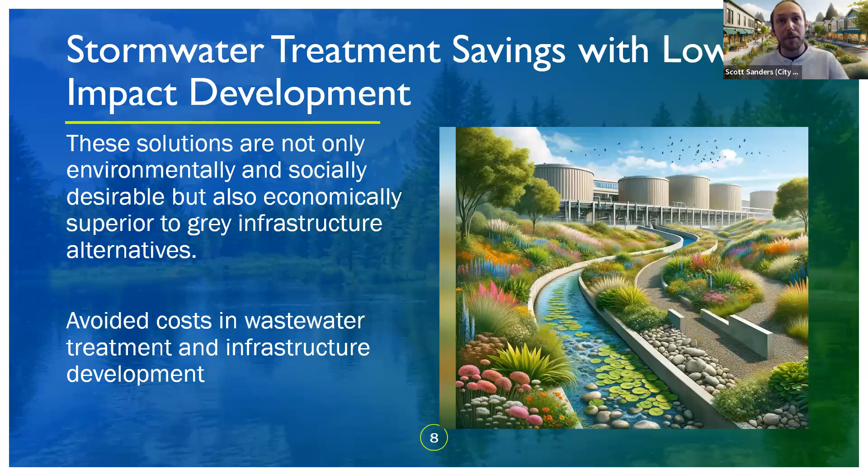Not just the cost savings, there's also energy savings. And what do I mean by energy savings? Well, low impact development is reshaping urban planning with its emphasis on energy efficiency and sustainable practices. At its core, it minimizes the reliance on energy-intensive stormwater pumping and conveyance systems, setting a new standard compared to your traditional gray infrastructure. This reduction in energy use for stormwater management is also just the beginning.

One of its most significant benefits is its role in mitigating the urban heat island effect. By integrating features like green roofs and permeable pavements, LID reduces the absorption and retention of heat in urban areas. These elements not only cool the immediate environment, but also decrease the surrounding air temperature, leading to substantial reductions in the energy needed for cooling buildings. Moreover, LID's use of trees and vegetation creates natural shade, further lowering the temperature and reducing the demand for both cooling in summer and heating in winter.

This natural shading, coupled with the cooling effects of green spaces, significantly cuts down energy consumption related to heating, ventilation, and air conditioning systems. Furthermore, LID enhances local microclimates. By incorporating natural elements and reducing impervious surfaces, LID promotes better air circulation and temperature regulation. This improvement in microclimates contributes to a more comfortable urban environment and to reducing our reliance on artificial climate control systems and hence the associated energy costs.

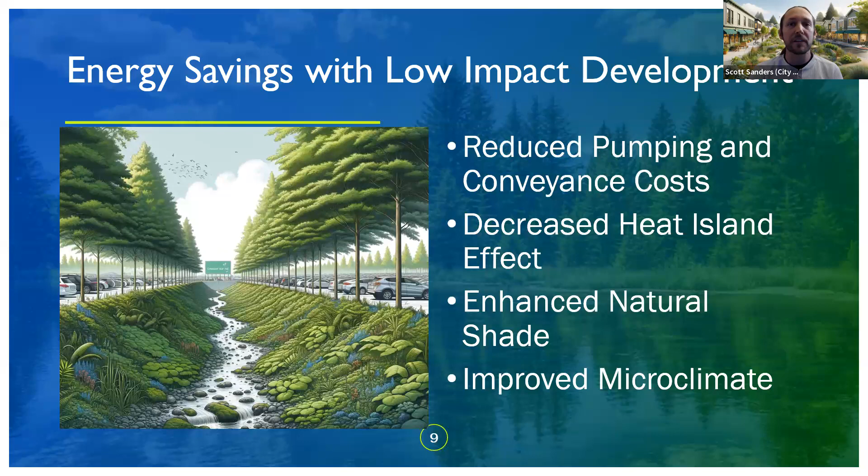And now, cost compared to gray infrastructure. Well, let's get into why LID isn't just an environmentally conscious choice, but it's also a financially good one, especially when compared to your traditional gray infrastructure.

And when we talk about construction costs, LID practices like bioretention basins, vegetated swales, permeable pavements, they typically require less upfront investment. This is not only because they often use less expensive and locally sourced materials, but also because they can be easily integrated into existing landscapes, reducing the need for costly overhauls. I've seen examples where the initial cost of LID implementations were significantly lower than those of conventional methods.

But even moving on to long-term maintenance, the natural self-sustaining design of LID means it generally requires less upkeep than gray infrastructure. Think about it. A rain garden or a green roof, once established, needs minimal maintenance compared to the ongoing repairs and replacements needed for concrete pipes and stormwater basins. This translates to substantial savings over time.

And not just savings there, but let's talk about property values, right? LID doesn't just save money, it makes spaces more attractive. Green spaces, improved water quality. These features make urban areas more desirable, driving up property values. This not only benefits property owners, but can also lead to tax revenues for cities.

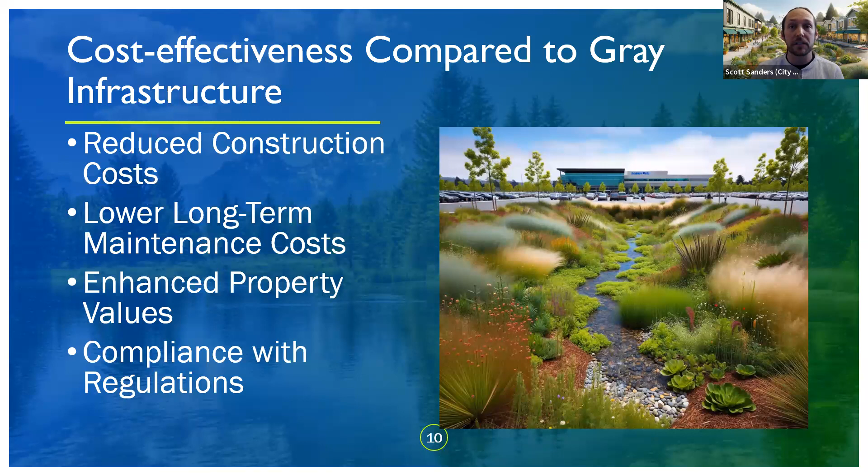Into some environmental benefits of low impact development, well, it exemplifies the principle that form follows function in its approach to environmental stewardship; they're designed to harmonize with nature. LID transforms urban planning by enhancing stormwater management in a way that is both aesthetically pleasing and functionally effective. The key lies in allowing water to naturally infiltrate the soil, thereby reducing runoff and pollution. A clear instance where the design, the form, directly complements its purpose, the function.

So take, for instance, features like rain gardens and permeable pavements. These aren't just efficient solutions for stormwater management, they're also aesthetic elements that enhance urban landscapes. They embody the concept of form follows function by serving dual roles, managing water effectively, while also adding visual appeal and fostering biodiversity. These features create habitats for wildlife and support a diverse range of flora and fauna, integrating nature into our urban fabric.

Moreover, LID addresses, like I said earlier, the urban heat island effect. They integrate natural elements into cityscapes. LID helps make our cities cooler and more livable. And this is a perfect example of how functional design can lead to greater comfort and environmental benefits.

In essence, LID is more than a mere development strategy. It's a commitment to a sustainable future, where the form of our urban spaces is intrinsically linked to their ecological function. It's about creating environments that not only serve their intended purpose, but do so in a way that respects and enhances our natural world.

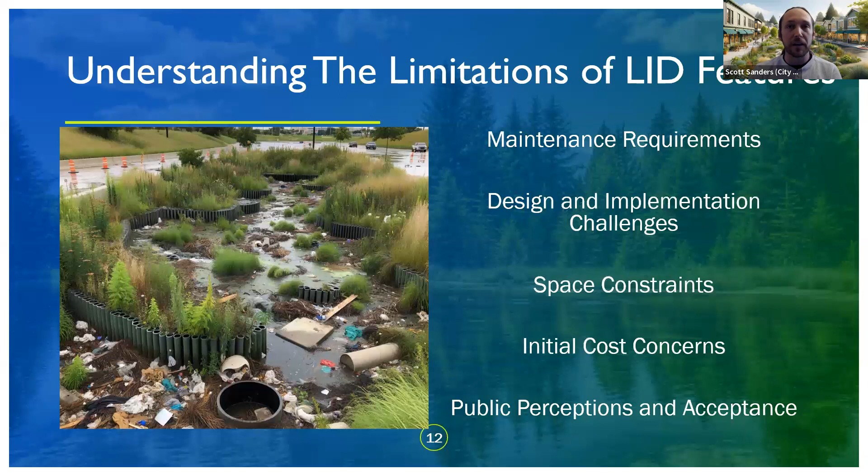So a big one that's always out there is the focus on maintenance. A poorly maintained LID feature is not going to work well, and it is crucial to recognize that it's not just routine upkeep. LID maintenance demands regular specialized attention, distinct from traditional practices, and carries its own set of cost implications. This level of care is vital. Neglecting it can lead to problems like clogged filtration systems, which severely undercut the ecological efficiency of these systems.

Today, we're not just examining the maintenance challenges and their impact on LID functionality, we're also exploring effective solutions to uphold the integrity and performance of LID installations. We're going to have a whole panel discussion later. It's going to go over the operation and maintenance and how important and vital it is for these systems to be maintained in the long term.

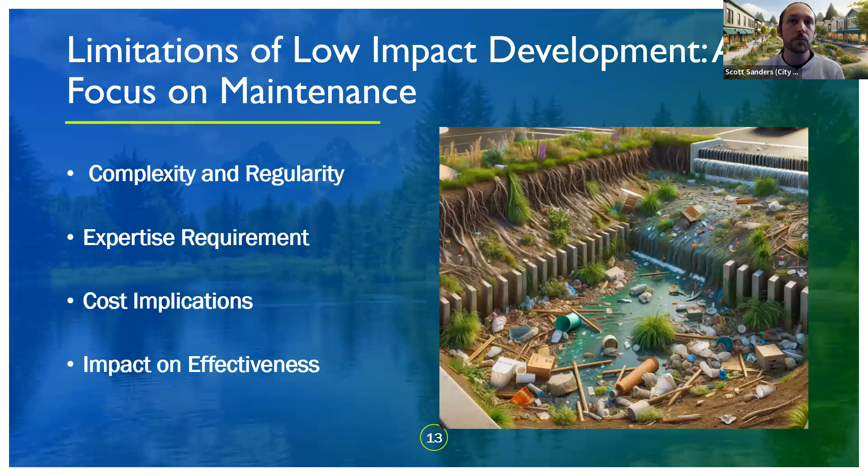And there's always limitations of LIDs and the design and implementation challenges. Designing and implementing low impact development has its own challenges. From integrating with current infrastructure to navigating the maze of regulation and policies, each step requires careful consideration. So site-specific conditions, knowledge gaps, financial constraints, and the need for long-term planning and coordination further complicate these LID projects. We're going to discuss how these factors can inhibit LID practices and what measures can be taken to overcome these hurdles for a more sustainable future.

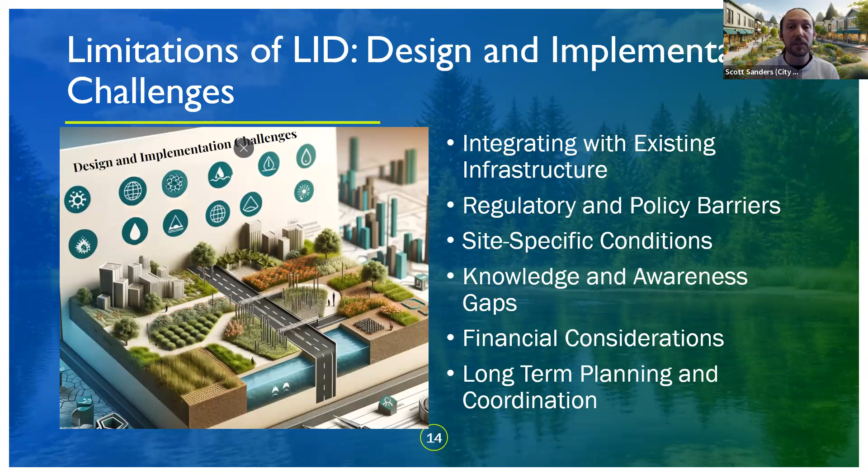Our first limitation here is navigating space constraints. Space constraints in dense urban environments pose significant challenges to low impact development. Property boundaries, ownership issues, zoning regulations can all limit the implementation of LID features. Retrofitting LID into existing landscapes often requires innovative, multifunctional designs to maximize the limited space we have. Today, we address how to navigate these constraints, ensuring that LID can be part of our urban ecosystem, even where space is at a premium.

And as cost-effective as LID can be, it can also have initial cost concerns. The initial costs associated with low impact development can be a barrier to its adoption. Customized designs, infrastructure modifications, and specialized materials and plant selections contribute to these upfront investments. Additionally, the need for trained labor and potential economic incentives or returns on investments must be considered. We'll explore these financial concerns, emphasizing the long-term value LID brings through its sustainable practices and the potential for cost recovery over time.

And that was kind of my beginning section. That was an overview of benefits of LID and some of its limitations. I'm going to stop sharing my screen right now, and Ashley's going to be introduced here. Ashley Cotter, she's with the City of Rohnert Park as well. And she's going to present what was on previous trainings.

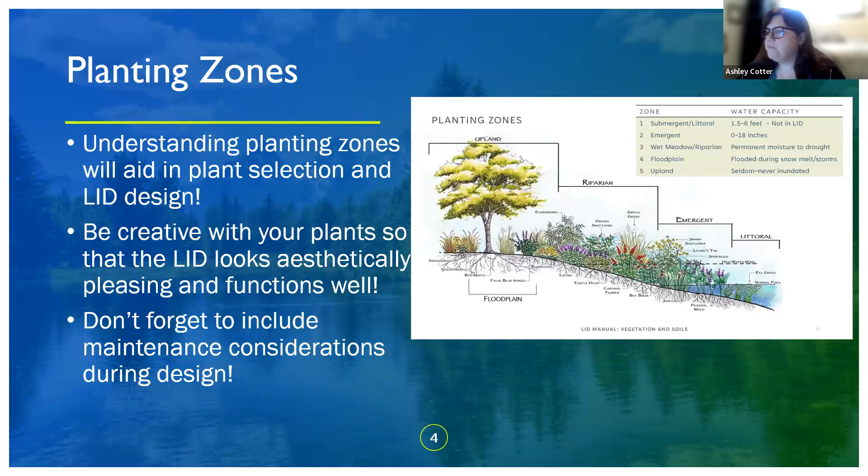Elizabeth and Alyssa provided some great examples on maintenance and situations in which maintenance was neglected and considerations to make during design. And that also impacts your plant selection as well. So maintenance would include weeding, cleaning out leaf debris and trash, and making sure your splash diverters are where they're supposed to be. So that is critical as well. Again, just to make sure that your LID functions the way it's supposed to.

And then another thing they touched on was the importance of the consistent use of terminology. They pointed out that grassy swales and bioswales are kind of used interchangeably, but they actually do have different features that really differentiate them. So utilizing the correct terminology indicates what feature you're actually planning on utilizing during design and also has maintenance implications and whatnot. So making sure to utilize the correct terminology when submitting your design is important.

And then they also gave this really great graph on soil breakdown, and infiltration really depends on the kind of soil. So around here we do have a lot of clay soil, so the native soils in Sonoma County usually do need to be replaced, but they also aren't checked prior to construction, so that was interesting.

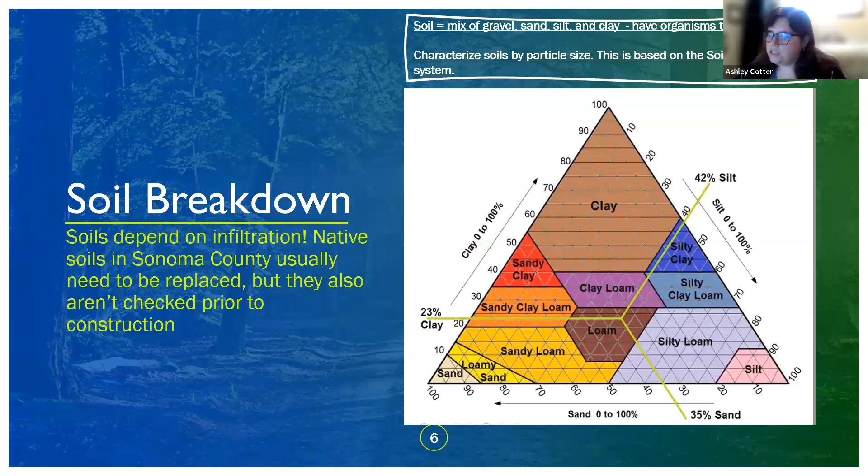And they also provided some more information on soils, about how everything comes together, and explained how the soil is classified utilizing a USDA classification, as well as hydrologic soil groups. Your engineer will look up a soil that will likely exist in the LID. However, the USDA maps are actually utilized for agriculture and crops, so they're not really utilized for LID infiltration. So the map will provide an approximation, but not anything site specific.

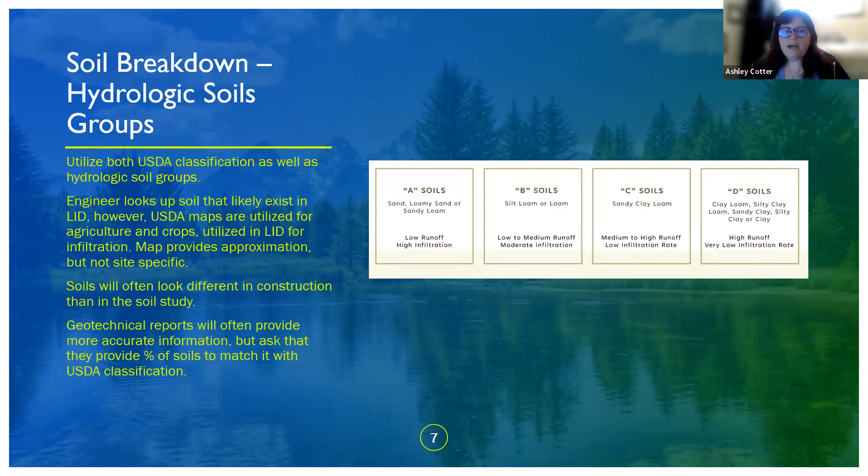And they also did explain that there is a likelihood that when you get into construction, the soil will look different in construction than in the soil study. So Elizabeth recommended that if you do have geotechnical reports, to ask for that. And you can also ask that they provide a percentage of soil so that you can match it to USDA classification. So that's helpful.

And then the types of soils in LID bioswales. First you've got your structural soils, and the structural soil is usually installed above the native soil when native soil can't be used, and structural is actually an engineered soil. And there is construction sediment that shouldn't contaminate it, so it's really important to keep that protected. Structural soil is well graded, medium and fine sand, mixed with a certain amount of organics so that plants can grow in it. And your bioswale soil mix is much finer than structural soil.

And then you've got your topsoil, which sometimes you don't actually need. That was interesting. And also it stressed the importance of mulch, which should be used in the beginning to help with weed control. So emphasis on mulch, not bark. Mulch protects the soil from erosion, traps particulate pollution, and reduces water flow and velocity with plants and rocks. Arbor mulch is the best, and again, don't use bark.

Also, they emphasized the timing of bioswale construction, which is so important. Ideally, the bioswale should be constructed at the very end because they don't want any construction contamination to get into the bioswales. If it's installed last, you don't necessarily have to test for contamination, but if it's installed early, then it will have to be tested before you're done in order to confirm that there is no contamination. So you can definitely protect your bioswale soils with geofabric unless it's dug in.

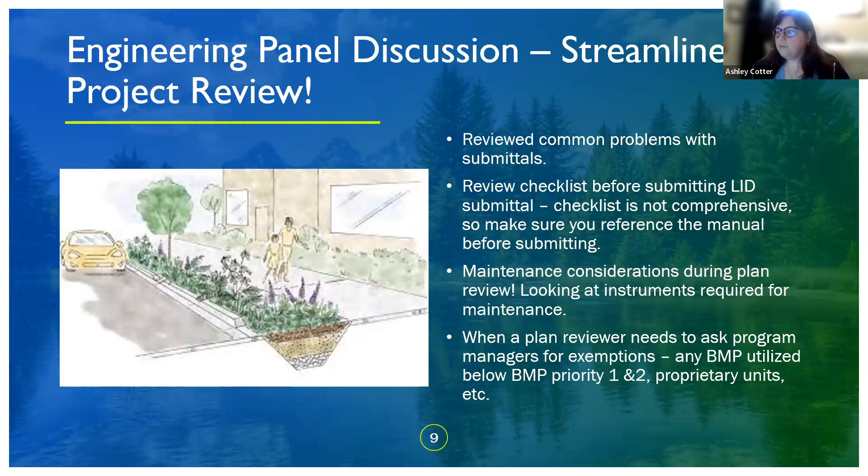Just make sure that you ask your program manager for any exemptions before submittal, such as any BMP over 1 and 2 or below 1 and 2. So you will need an exemption to do priority groups 3, 4, 5, and 6. Again, just tips and tricks for a correct submittal: consistency is absolutely key. Make sure that your submittal has all of its components and everything is spelled out in the narrative. They will indicate that things are in the narrative, and you go back and review, and it's actually not in the narrative. So that can really slow down your timing to get your LID design approved.

Use the LID calculator as much as you can. The city of Santa Rosa is pretty specific. They will not approve anything that is not using the LID calculator. The calculator is actually required per the LID manual, so alternative calculations will require additional review with an additional narrative. So the calculator really does provide a key level of consistency. And they also had some really good information about how submittals are reviewed from initial to final. So if that section interests you, I would encourage you to watch the training.

And then Heaven Moore also presented on compliance and some more FAQs for the 2022 training. And so again, that is just a really informational training because we will be touching on some subjects today, but not all. So if any of those sections really interest you or feel that they would be applicable to you,

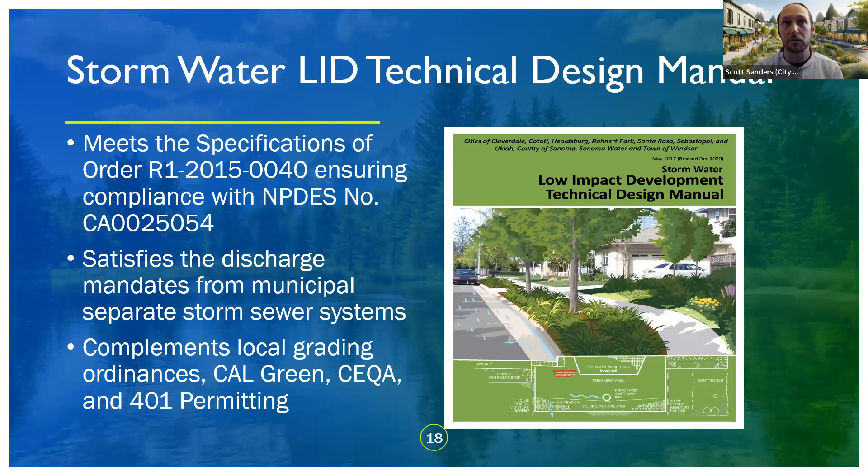So what does the manual start with? It has its own goals for sustainable development. So we shift to the core ambitions of this stormwater low impact development design manual. It anchors our efforts in sustainable development. This manual sets forth the strategic framework designed to uphold the quality and integrity of our water bodies. It aims to mitigate the adverse effects of stormwater runoff by preserving the biological integrity of aquatic ecosystems. The key aspect is the management of impervious surfaces, steering new developments towards a natural water balance through infiltration, evapotranspiration, and stormwater capture and reuse.

Furthermore, we commit to the reduction of pollutant loadings, addressing contaminants from hard surfaces. This is achieved through a blend of source control best management practices, BMPs, the most famous word of them all, and innovative LID planning and design strategies coupled with treatment control BMPs. The manual guides the selection and maintenance of these BMPs, ensuring that they're aptly chosen, designed, and sustained over time. It emphasizes hydromodification control to maintain post-development hydrology, ensuring that our interventions are as unobtrusive as possible to the natural environment, while also preventing the creation of habitats conducive to vectors. In essence, the goals articulated in this manual encapsulate our proactive stance towards a sustainable future, one where development and nature exist in a state of balanced coexistence.

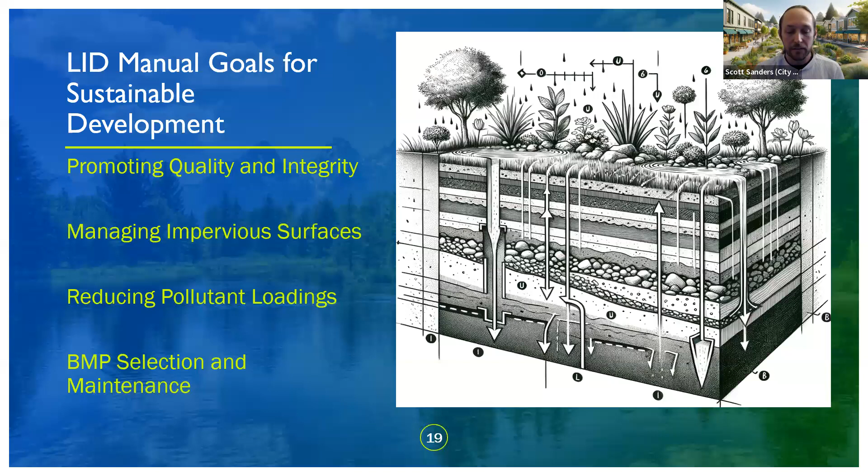And what the manual starts off with is understanding our project triggers. So it's crucial to grasp the project triggers, the specific conditions under which LID requirements are activated. The manual outlines that every parcel within the development, already improved or undergoing alteration, falls within our purview. Improved parcels signify areas previously developed and distinguishes them from untouched land. Yet, our responsibility extends beyond the site's confines, encompassing associated public improvements too.

This broad scope covers essential off-site work, like trenching for utilities and subsequent repaving, integral to the project's infrastructure. These tasks, while potentially situated on existing public roadways, are integral to assessing the project's full impact on stormwater management.

The manual clarifies the treatment of gravel on site. Historically, laid gravel is considered pervious, preserving the land's natural infiltration capacity, unless it's proven otherwise. But conversely, gravel that's introduced as part of a new development is treated as impervious by default, unless there's documented evidence to attest to its permeability.

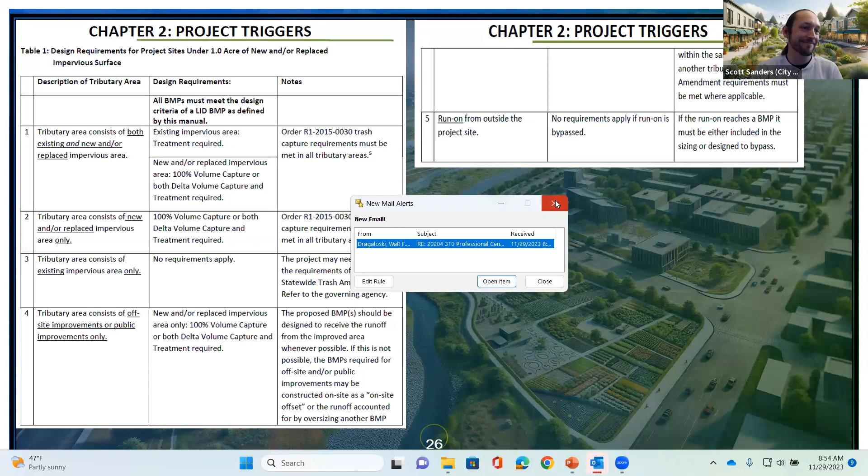Hey, Scott, your email alerts are showing. Oh, thank you, guys. Sorry about that, Scott. Oh, no, you're totally fine. I saw it there. I just forgot that that's the screen that's being shared.

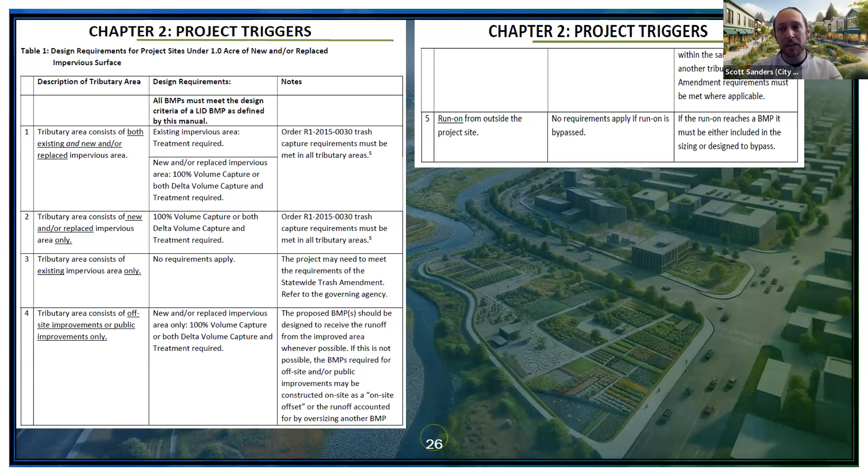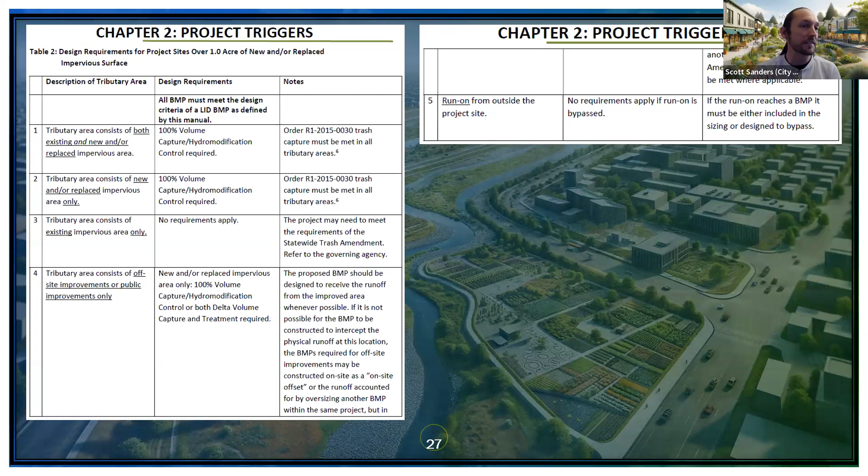So thank you, Flannery. So this table, it's more than guidelines. It helps you find out what your project needs. And the next table, this is for projects over 1 acre. This is moving to larger scale developments, and the criteria for stormwater management become a little more stringent, and it's all in Chapter 2 project triggers. And then the manual switches and goes into submittals. And submittals is a big one. And that's kind of where we're going to head into our next discussion.

We have a little panel discussion. So get ready, Michael and Jesus. I'm going to be bringing you guys to the forefront here soon. And I'm going to ask that you both introduce yourselves and explain your background and what you do. So let's start with Michael. Hi, my name is Michael. I'm the Stormwater Program Manager for the City of Healdsburg. I joined last May. Before that, I was an environmental compliance specialist with Mendocino County, working on MS4 stuff there. And part of my role here is reviewing submittals, both the initial and final, and then making sure they check out. So I will try to answer these panel questions to the best of my ability. Might have to rely on my peers for some of the questions.

Thank you, Michael. Jesus? Hi, pardon me. My name's Jesus McKaig. I work for the City of Santa Rosa, and I am a staff engineer. So I review primarily entitlement projects and building permits. So I really only look at the initial SULIDs, not the final, and I also don't have much dealing with inspection. I do interface with both Flannery Banks and Nick Sudano here in the city as well, so I do have some perspective from outside of that exact review. But primarily I look at the initial SULIDs. I've been working for the city almost 17 years. I will also endeavor to answer any questions. And if I look like I'm floundering for even 1 second, somebody with more knowledge jump in immediately. But otherwise, I will do my best.

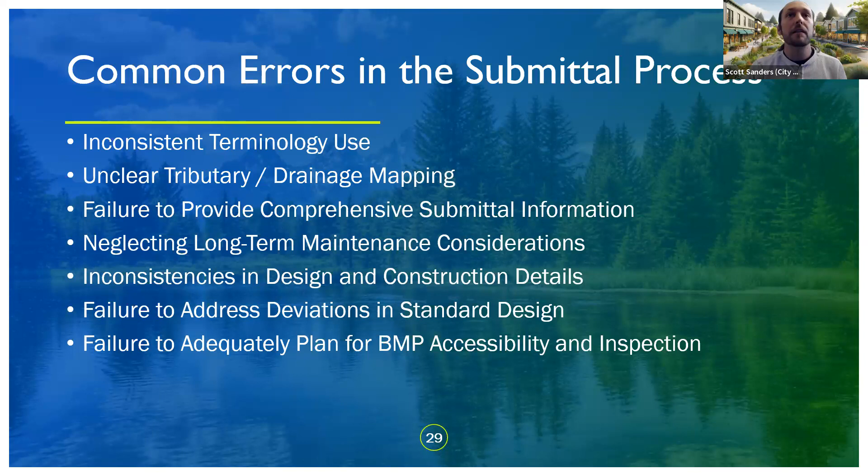And this isn't just about pinpointing issues, it's about enhancing our approach to low impact development. Each challenge presents an opportunity for learning and improvement. Again, when we go through this, feel free to throw some stuff in the chat if we can speak to anything more clearly.

Our first one is going to be for inconsistencies in terminology used within this dynamic field. With LID projects, we have the potential to improve how we manage stormwater and design these landscapes, but at times the language we use can become a stumbling block. And today we're going to aim to explore the impact of these interchangeable terms. You got multiple people working on these features that might not be in communication, so we're going to figure out how we can all come together.

So let's see here. We're going to start with, let me see, my first question. Let me get my questions up.

All right. Michael, can I do this first question for you? It's kind of your role as a plan reviewer. Have you encountered situations where terms like bioretention, rain garden, detention basins, if you're the architect or the engineer, are people using these interchangeably? And could you describe any challenges or misunderstandings that arose from this confusion?

Yeah, there seem to be subtle differences between certain terms which are often used interchangeably. It's common to see words like bioretention and bioswale used interchangeably, along with the terms detention basin and retention basin. When these terms are used in an incorrect manner, as a plan reviewer it's difficult to determine the actual intent of the design. For example, if a plan references a detention basin as a BMP to meet LID requirements, this can be problematic for the plan reviewer to understand if the LID manual requirements are going to be met.

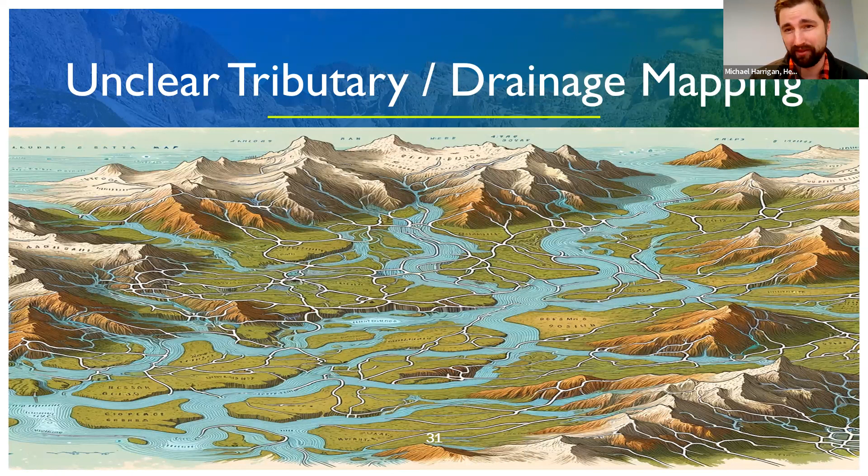We had one project where there was a disconnected roof, and all the runoff from that ended up going straight to a storm drain. It was before my time, but they went back and looked at it, and they were like, oh, there weren't actually clear elevation markings in the plans. So just things like that can arise.

And if I could just add a comment too, this is Heaven with the Water Board. I'm stating the obvious, but just for clarity, it's important that this is truly an exercise of delineating the tributary area, not the tributary area limited to the property line or project footprint, because what we're wanting to make sure is calculated and addressed is that the BMP or the high flow bypass structure is properly sized for the water that it receives.

And so having this information, the design team can make important decisions about whether off-site run-on is commingled or whether it's bypassed. Make sure that flood control and high flow bypass are addressed, and make sure that the individual BMP, which is why you don't have just one tributary area for the entire site, right? But a tributary area for each inlet and each associated BMP is properly sized and designed for that particular amount of drainage that it needs to manage and treat.

So again, oversimplifying, preaching to the choir here, but that's an important distinction that we truly are talking about tributary area. Yeah, I think that's very well put. I've seen a plan where it's just one tributary for the entire property when water wasn't actually draining like that. So I think it's worth emphasizing. Great, thank you.

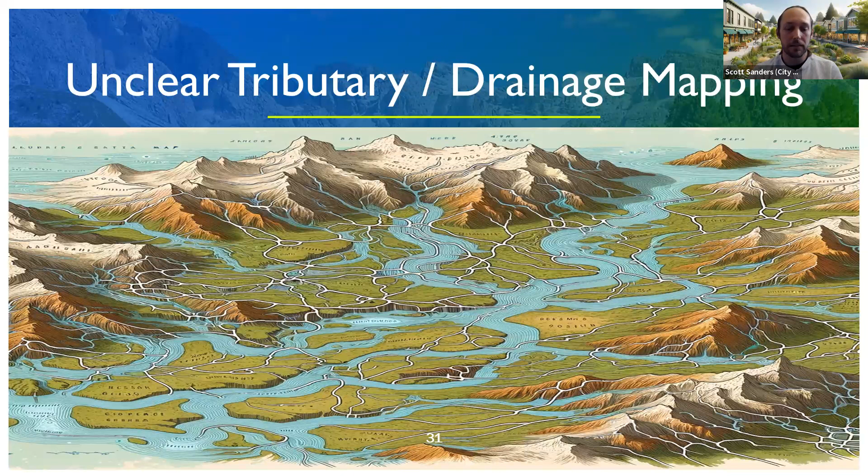All right. And then our next topic, let's see here. Okay, failure to provide comprehensive submittal information. So here we're going to emphasize the significance of detailed narratives and handling sensitive features and triggers for LID development, and the importance of pollution prevention and runoff reduction measures in these submittals. And I want to start off maybe with you, Jesus. Can you share an example where a comprehensive project narrative played a crucial role in achieving LID project objectives?

Well, if you don't mind, I'd probably want to take it from the other direction, just because I'm finding more often than not that the narrative itself, which is where you get the opportunity to talk about your project top to bottom, where it is, what it's about, what its full scope is, that's often missed.

I have found, and maybe this isn't one example, it's probably several kind of conflated, but where the narrative will either not address topics such as, if there's a groundwater issue, like it's very high groundwater, it's not in there, or sometimes the soil type won't be called out in there, or will be called out differently in the narrative than it is in the supporting reference documents, which is like, well, that's kind of a head scratcher. And then you got a third one in the calculator. So which one are you really using?

I have found that when the narrative does cover all the bases, I mean, if you have a creek in your backyard, if you have a bunch of trees on site, any of that, or covering utility work in the streets, like the trenching, when it covers everything, it really paints a better picture for reviewing than the calculations and the exhibits and all that. And if they don't speak to each other, then you kind of don't have a cohesive report. And yeah, I'd say the narrative is one of the most important parts.

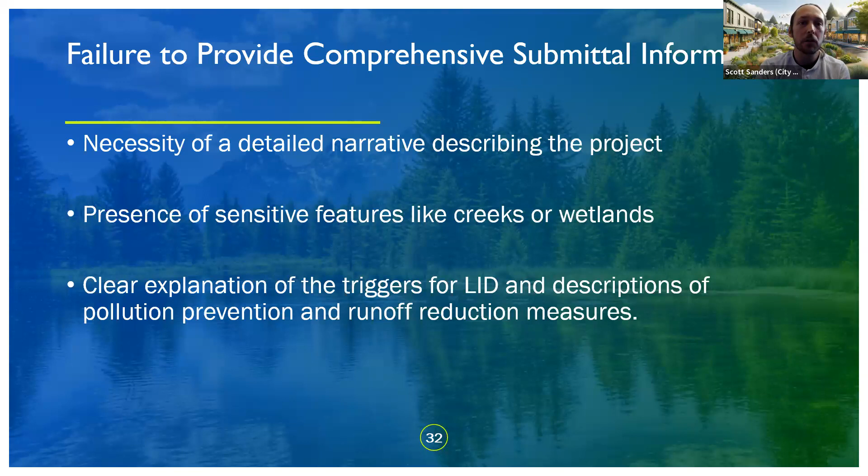All right, and we're gonna keep going. We're gonna skip this slide because we do talk about a lot of long-term maintenance in our next panel discussion, and just for time. But here we're gonna come to discussion revolving around common pitfalls that often surface in LID projects: the failure to identify and correct deviations from standard design. This is always a crucial issue that can impact efficiency, compliance, and the long-term success of these LIDs.

Jesus, I'm going to ask this first question to you if you feel comfortable with it. I have my own answer if not, but in your experience as a reviewer of these submittals, can you share instances where you've encountered deviations from the standard LID design, and what were the implications of these?

So with regard to deviations from standard design here, we're referring to if applicants or their engineers choose BMPs that are either not listed or differ greatly from what is listed in the manual, and it either doesn't function with the site or requires additional review. Is that what you're looking at? That happens all the time, if that's what you mean.

Yeah, I've also encountered deviations in the sizing and the placement of these bioretention facilities. Some projects attempted to reduce costs by undersizing the features, and that just leads to insufficient stormwater management capacity and increased runoff. Gotcha. And common deviations involve vegetation selection, and it seems like they always deviate and they don't think we're going to catch it or something.

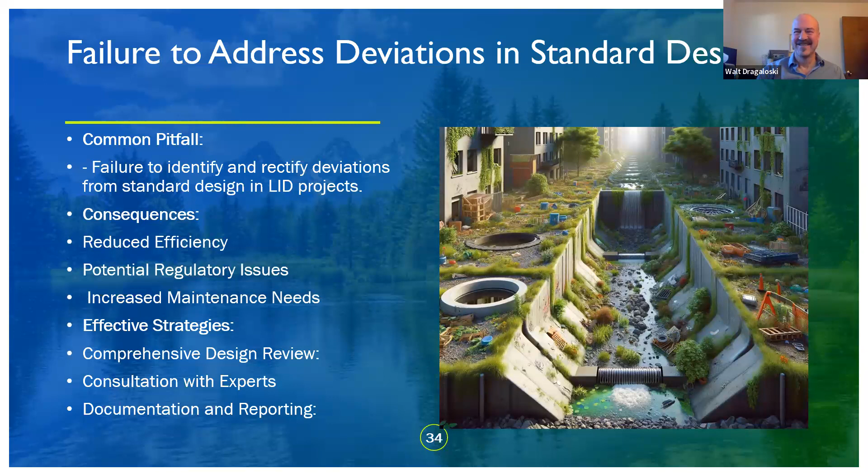Great. And we love your soapbox, Evan, so bring it out whenever you need it. And then that's actually going to finish our first panel discussion. So thank you to our panel members. Michael, Jesus, loved it. Thank you so much. Anytime. They're all week.

All right, and then Flannery. Do you want to jump on in? Yeah, thanks. Just takes a second to get set up. Sorry, it's always tricky to get your presentation going and still see the Zoom info. Okay.

So today I'm going to be covering a few of the case studies that we have. We've done this before and it seemed very beneficial. So I'm going to run through these pretty fast, and we're just going to be focusing on what the specific site challenges were and what the site constraints were and how these projects moved through them, and some additional paths forward that we could see as staff. So it's focusing on those challenging sites where you're restricted by contamination or historical buildings or space of assorted variety.

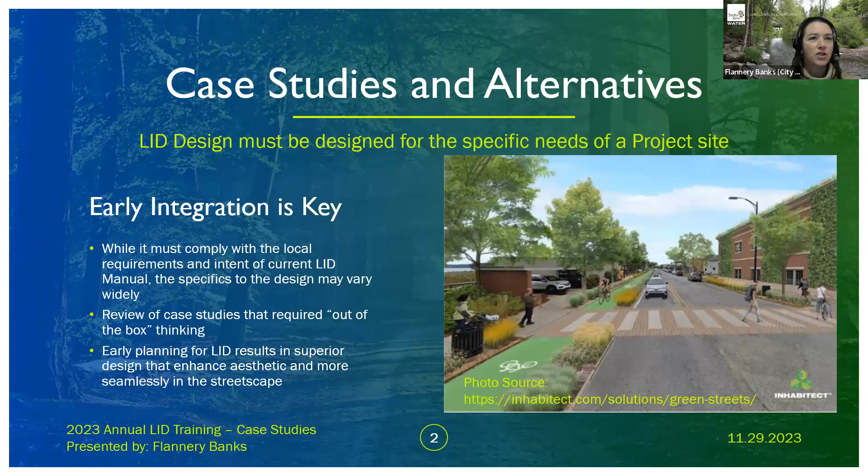So while you do have to comply to our LID manual and its requirements and our regional interpretations of the permit, especially with the more and more infill projects that we're getting, you really need to think outside of the box and keep in mind that, while you're following our standard details for LID, you really need to be sizing it, changing the geometry, making adjustments for whatever is very specific to your site.

The first project we have up is the Cannery project. So this is off West 3rd in Santa Rosa. All the projects I'm speaking to today are from Santa Rosa, and I did not introduce myself well. I'm sorry. I'm Flannery Banks. I'm one of the co-permittees. I'm with Santa Rosa, and I'm the storm drain asset manager for Santa Rosa and serve as the technical expert around stormwater and storm drain for Santa Rosa.

So this is a Santa Rosa project. It's Cannery. It's a former cannery, and what you see in this image, photo credit to Press Democrat, but they had this historical facade that they were required to keep. They had very specific street requirements. It was a very narrow public right of way. It's actually going to be a private street, I believe, at this point. And they had a lot of space constraints with this facade fitting in the city section.

So it was a multi-story, 6-story apartment complex. So there's aerial, there's very strict fire department requirements for access on this one. There's strict street section requirements. They had to do a contiguous curb, gutter, and sidewalk. There's just no room in this area for the landscape strips, especially taking into consideration the historical building.

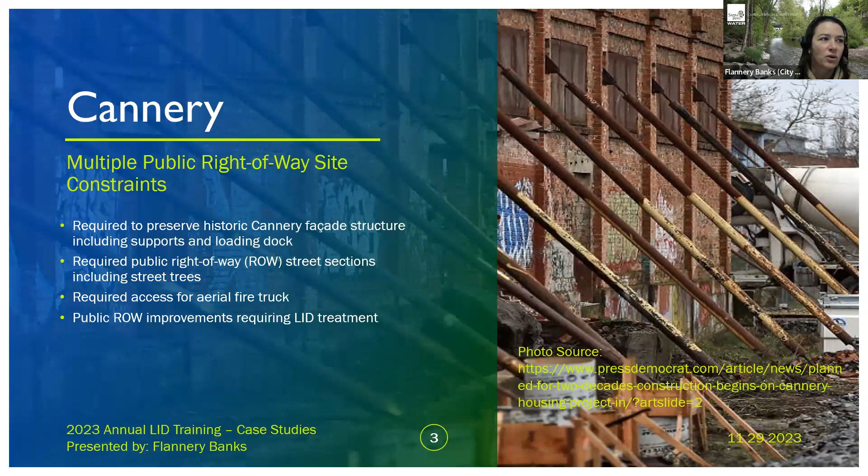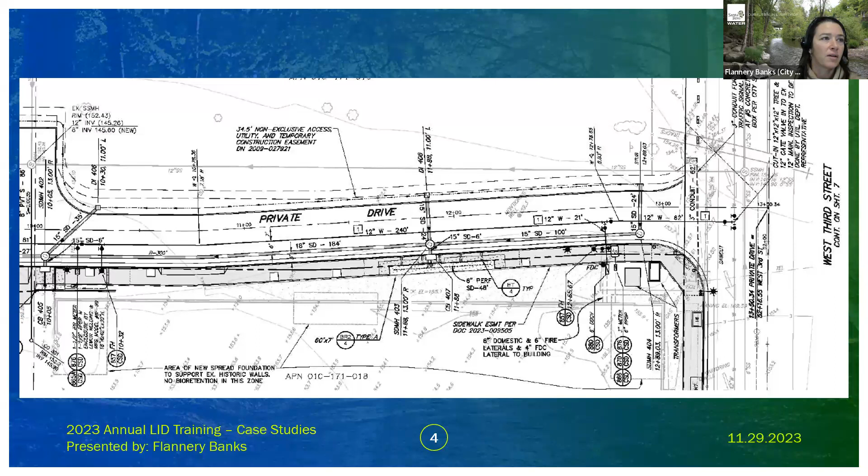And the project came to us in entitlement and said, I don't know how to meet our LID requirements with all these other requirements you have on the project. Like, help me find a path forward for this. So we met as city staff, and I encourage other jurisdictions to consider this, that when it's all of our regulations getting in a project's way, so to speak, I feel that it's really part of our duty of service to have those internal dialogues and try to figure out how this project can move forward.

So we had an internal meeting with entitlement, we had traffic engineering, we had fire department, and myself to hash out all these different requirements on this project. And what the project ended up coming up with was a partial daylighted, partial subsurface bioretention facility. They're using trench drains to get the water from the roadway underneath the sidewalk back into this facility. And part of it's daylighted, and portions of this abut raised planters to help with the LID and the beautification and the vegetation component.

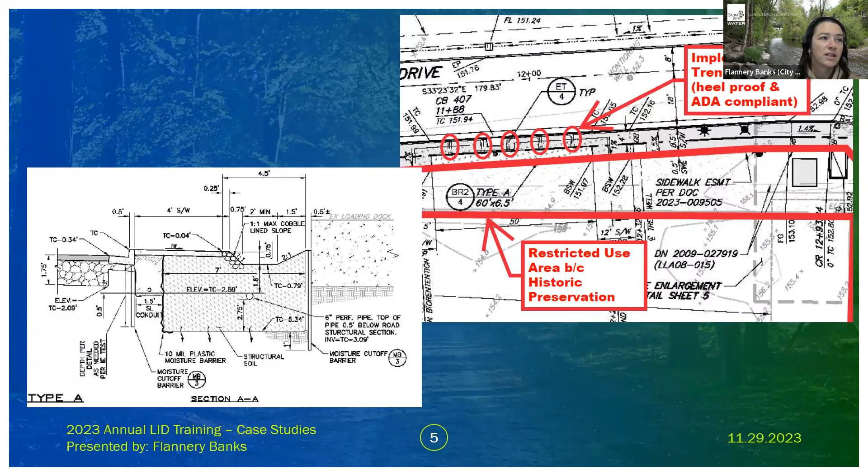And then a significant portion of this is underneath the sidewalk. There's moisture barriers to help protect the roadway structural section and the other utilities. So they implemented these heel-proof and ADA compliant trench grates to get it behind this back of walk. These are the trench grates they used. And this is one version that we're recommending to people when they need it for conveyance. So this helps a lot when your LID feature is going to be behind your contiguous curb, gutter, and sidewalk. You still need a way to get it back there. So this is one version that we recommend.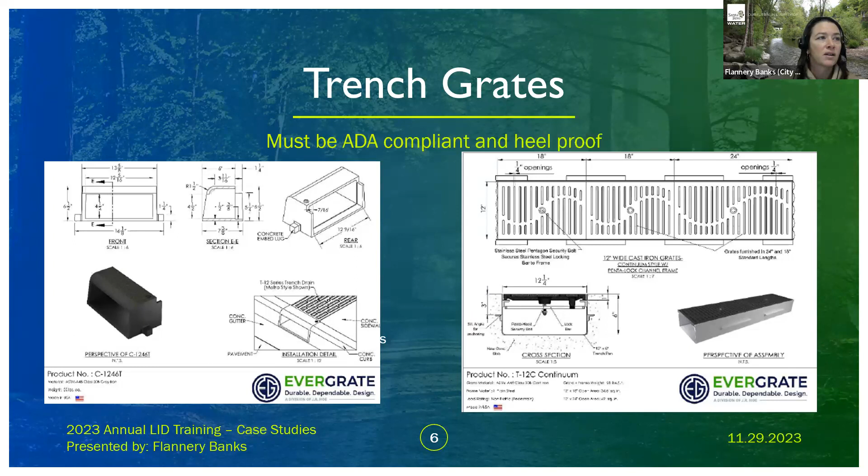Of course, we don't recommend specific proprietary products. We are probably going to be putting some on our approved engineers list for Santa Rosa. But this is one example of the tools that you guys can have in your toolbox. To switch back to speaking about what we can do as jurisdictional staff to help the private development, another alternative that we came up with as staff is that they could also do a bulb out section. Now, this would require some agreements with the city.

If they were going to do the bulb out, because of the ladder aerial reaches and the radii with the ladder, the sidewalk was going to have to be H20 load rated, and there was going to be no parking and fire lane signs posted with the mountable dike. So the idea is that the fire truck could easily go up onto the sidewalk, and the sidewalk would be designed to carry that load for the area where the LID had to be incorporated behind the back of walk. So this is another example of what we can do as staff to get people in a room to help these projects find a path forward.

Ultimately, this isn't the design option they went with. They were able to figure out another way to do it. But this would have been another design alternative that the city would have been open to. Not the most desirable thing, but one way that we were able to work with the consultants and find a path forward for the project with all the different restrictions and the requirements we were putting on the project. So collaborate with your other departments when it's really city and state requirements that are painting a project into a corner.

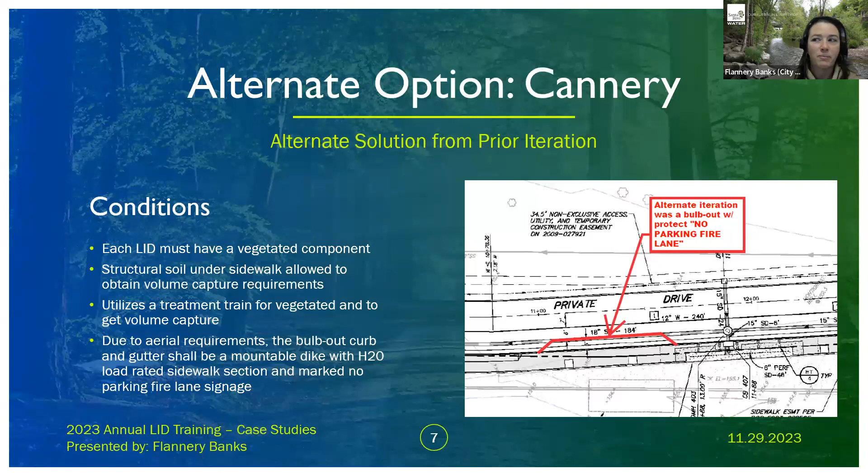So the next one we have is Coors Court Lot. This is in the south end of Santa Rosa. And while it seems like it would be very easy to get LID on this project site, it was a little bit challenging. They had a lot of parking requirements that they had to comply with.

This is another situation where the project was conditioned to add curb, gutter, and sidewalk, although in this area, we do allow it to be contiguous. But they did have a lot of site adjacent improvements by having to install that new curb, gutter, and sidewalk.

The challenge they had is that we were not going to allow them to encroach outside of this geometric footprint. So they were not going to have the option for the bulb out options on the site. So they had to treat everything, including their impacts to the offsite with their on-site LID.

What they developed is a pretty typical at face value looking LID. This bioretention area. I included a screenshot of the detail and the curb openings. So they used a mixture of curb openings on the site. They're also taking roadway drainage. This one, they could have used a trench grate, but they had two double small diameter pipes to get that water over into the LID for their street requirements.

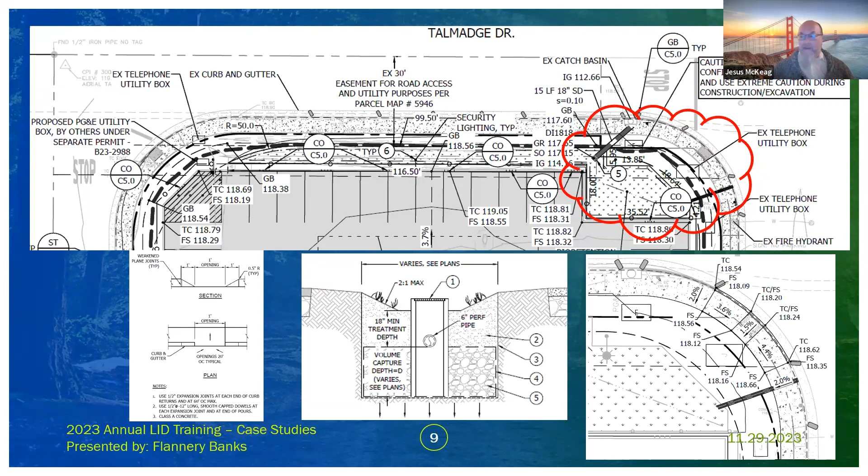Yep. So that's a bit of a funky change that you're seeing on the development side, but it's getting into the space constraints and all the requirements, right? So if you're doing improvements outside of your property in the public right of way, those improvements, unless they're specifically categorically exempt from LID, you still need to provide treatment, and that can lead to challenges when you can't separate the watershed out. So you have to think of it in a way, how do I place my on-site interception, something like a trench grate?

Where do I place that within the streetscape so that, while I'm meeting my project's LID triggers, I'm limiting how much treatment comes in that I'm not responsible for through the permit. So another way to deal with that is orifice plates or weirs, if you're having issues separating out your required LID treatment from your total tributary shed. So again, that's a design alternative that could have been used in this situation to limit how much offsite they're treating beyond their required amounts.

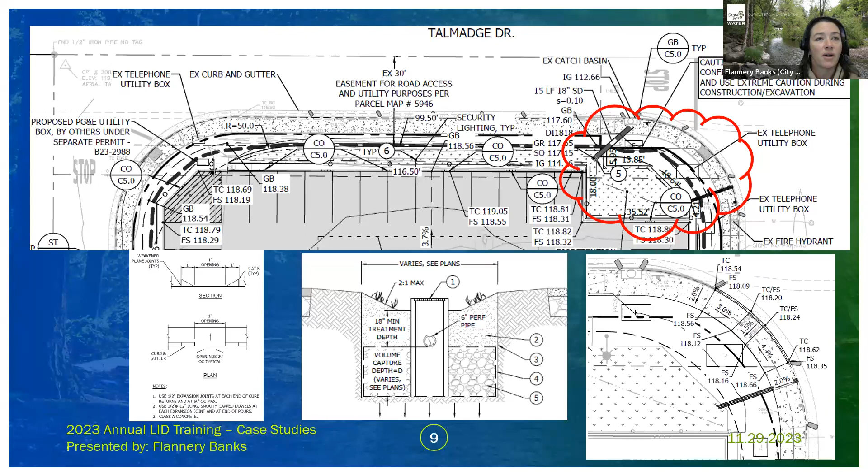But you really need to outline what you're doing in your SULID report. So that's where it's really important to tell the story of what you're trying to achieve so that city staff can follow what you're trying to do. And in the future property owners understand what they're obligated to and how the design was generated.

Some alternative options on this one, it wasn't really allowed because of the space constraints, but they could have done some bulb out designs around the ADA ramps, which they would have had to pull it back towards the property right of way in this case, but there was still avenues where you could somewhat use a bulb out design and hold the curb gutter line. So this would have bulbed out more into the property as opposed to the streetscape, but it would have been another option.

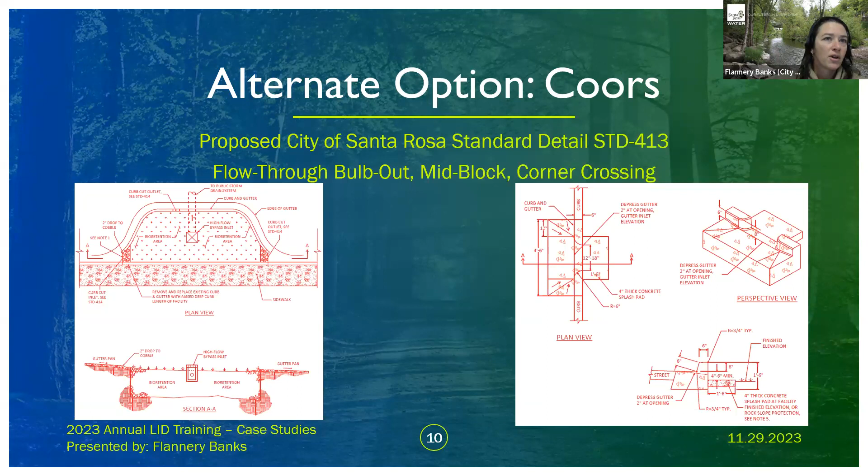So it did trigger LID in the project nature itself, and it did have these street improvements. So this was the original design, and this got flagged because of these adjacent, see, I almost did it myself. These are these public right-of-way improvements, this driveway apron, the reconnection of the pavement. This was all triggered. This was all subject to LID.

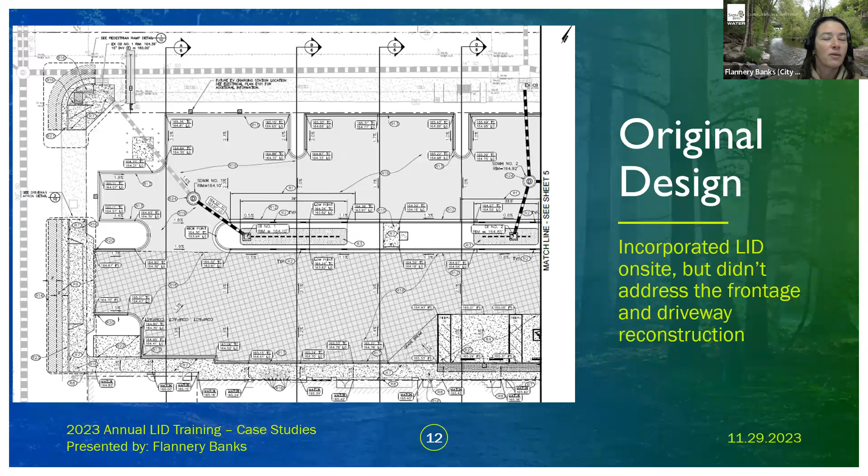What was not subject to LID requirements was the addition of this ADA ramp. So again, remember that that's a specific exemption with our permit in our region, that ADA ramps, if you're doing an improvement to meet ADA requirements, that can be an exempt task. So this ramp was exempt, this driveway and the reconstruction of the failing sidewalk was not exempt. So it got flagged in our internal review.

What they ended up doing is modifying how they did the ADA approaches, and they put the bulb out. They did use a bulb out design in this. So the water flows through its originally designed gutter pan and gets into this LID, which is sized for its full tributary area. And then we do have existing storm drain infrastructure in this area. So this catch basin on the left will tie into that manhole, which is a circular thing just to the right of it, for its discharge point. So that's the modification that was done. And that was specifically because of the public right-of-way reconstruction, not counting the ADA ramp that was being performed.

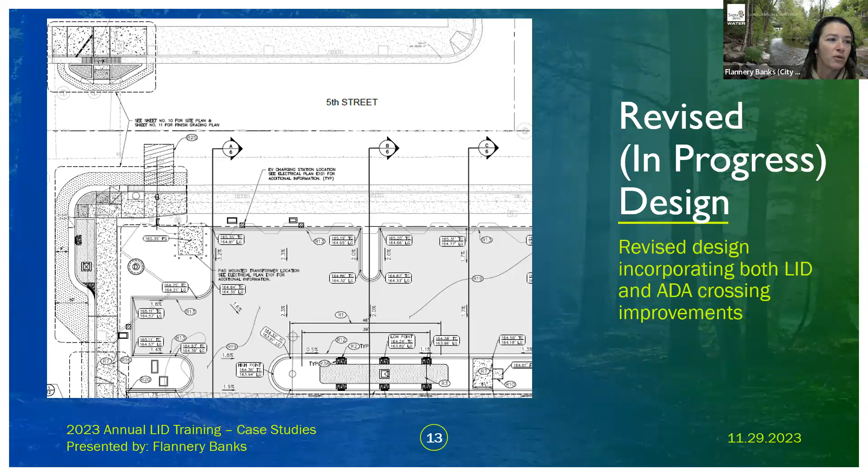Here's just a more detail on the piped infrastructure. So they did have piped infrastructure that they could connect to, so there was no need for it to be a flow through design.

So yeah, another big thing that we are seeing missing from the engineering is these velocity dissipation pads, these cobble pads, and that needs to be a function of your velocities coming into the feature. So that's a design function. We do have some standard language around it, but we are having to comment on that piece quite a bit. And you need to specify the full footprint of it, including the depth and the size of the rock. So that's one thing that we are seeing missing on a lot of submittals.

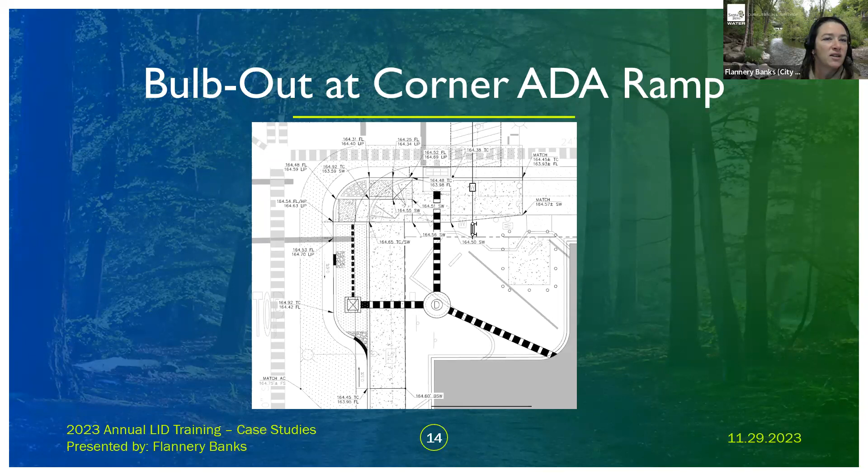A little more information on this. So I just wanted to point out, these things go much more smoothly in construction when you actually involve a landscape architect. So we do have a landscape architect on this contract, and they did call out the plants for the bioretention facility. So really, you get a better project, and your future property owners will be much happier if you involve the landscape architect. Then you get something that's visually, aesthetically beautiful, not an eyesore, not one type of vegetation. So I just wanted to point out that was done well in this project.

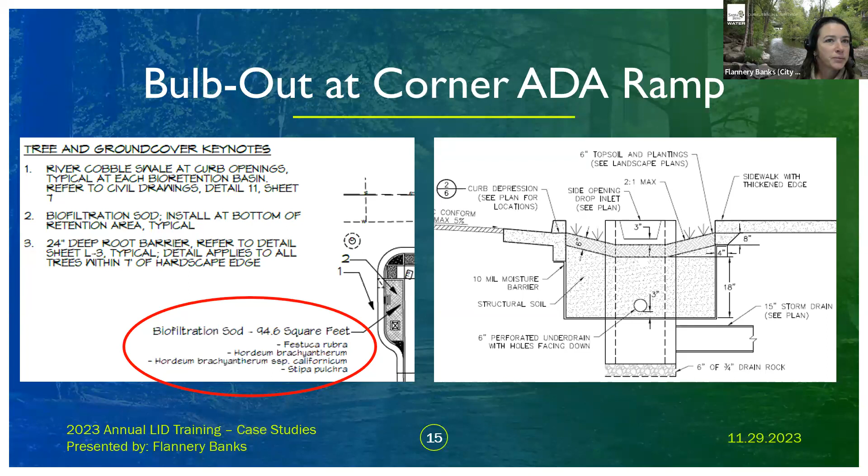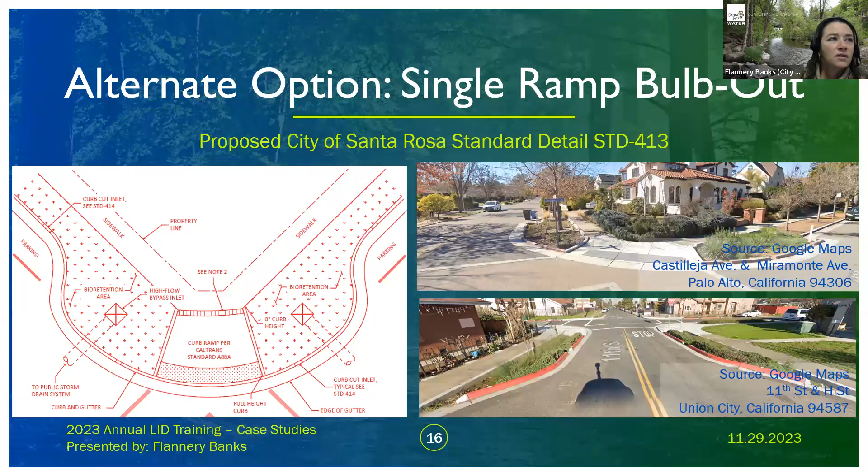So this project was proactive. They took our recommendation. This project went in front of the regional board, presented by the co-permittees. So the process to go to the regional board during this is you talk to your co-permittee of the agency that's reviewing your plans, and they will coordinate with the regional board to get in front of them. That's a standing office hours that co-permittee has with the regional board staff.

We have the ability to meet once a month. That's the last Monday of the month, but that has to be at the request of the co-permittees. So if you go as a private consultant requesting time without your co-permittee, or asking instead of your co-permittee, the regional board response is going to say you need to coordinate with your co-permittee.

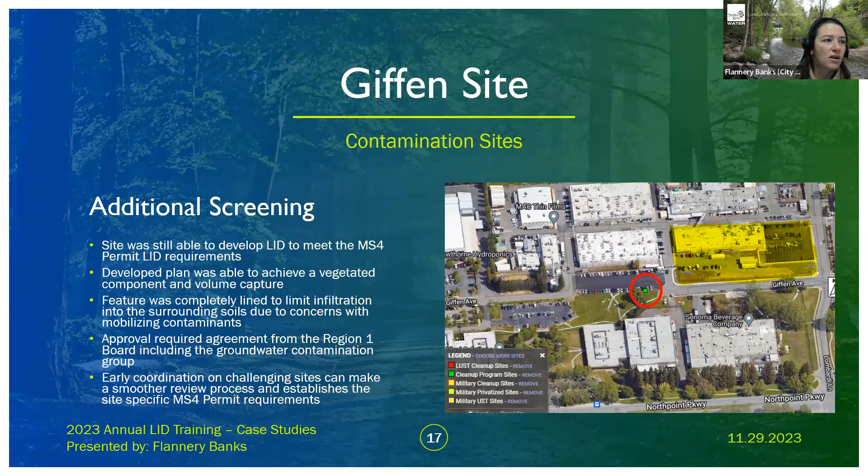They were proposing a large-scale singular BMP for this project site. The project site's in yellow. The red circles the GeoTracker contamination point that was supplied. We asked to go to the regional board open office hours to screen this project. We invited the consultant along, and ultimately the regional board was okay with this design. It did have its required volume capture, and it did have a vegetated component.

What was approved on this was a full plastic moisture barrier, 10 mil moisture barrier to isolate it. So this is a project that does not infiltrate into the groundwater, nor was there any intent to allow this project to infiltrate into groundwater. After the office hours, the regional board followed up with staff and gave us a written email that this was appropriate for the site given contamination concerns. And then that email was included in the SULID report.

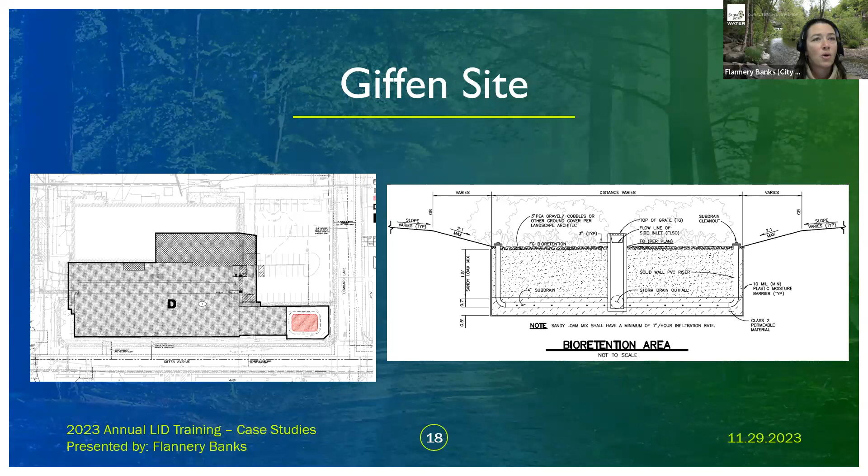So right at the entitlement phase, all this was handled. The regional board stance was documented in the SULID report with that email, so there was no confusion when the project moved forward into the engineering reviews, and it just went a lot smoother. So tricky site. It was given this exemption to fully encompass the LID feature with plastic because of the contamination. But when you operate this way with staff, it makes for a much quicker and smoother review process for projects.

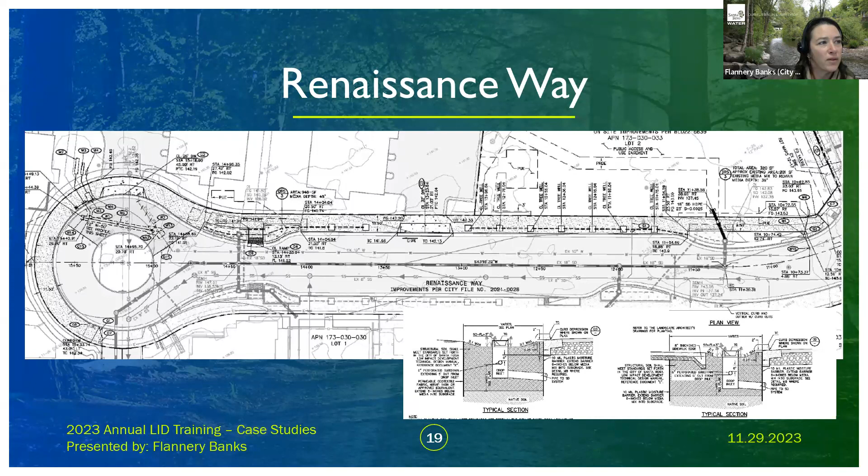But I just wanted to give you a great example. LID doesn't have to be this tiny annoying thing in front of every household. Santa Rosa in particular is pretty supportive of the bulb out design. It helps us with traffic calming. I just thought this was a really great layout, and one of the results you can have when you think about it on the front end of your design and not as an afterthought. Pretty seamless. It will look really pretty. City staff was supportive, and no part of this required any sort of special buy off.

So going back to the whole theme of this year's training: form follows function. It's really important to remember that while we do have the LID manual, and it does make for a quicker approval when you follow the LID manual, things like geometry or dealing with slopes to achieve your contact time are specific to every project and every design. So you don't have to think of it as this rectangle thing in the landscaped area between the sidewalk and the curb and gutter. It can have a lot of different looks when you think about it ahead.

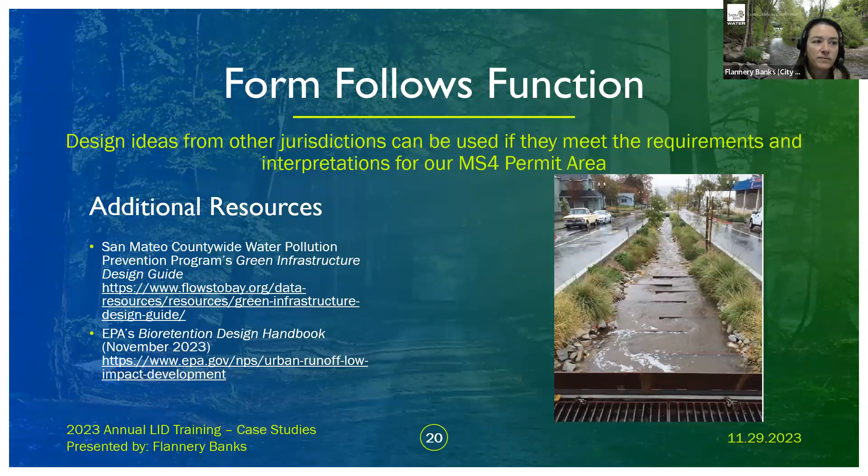For the weir system on steep slopes, I'll just add that depending on the soils you're on, in the city, those seem to tend to be the Goulding cobbly loams. We do have pretty significant concerns about slope stability. So you'll need to work with your geotech, and you may be required to give a stamped letter from your geotech that the infiltration will not create slope stability issues.

So again, if you have handled your LID on the very front end of your project, you can plan for this. And when you're working with your geotech, you can make sure that commenting on the LID or infiltration will not create slope instabilities. They can incorporate that into their geotech report. So if you know you're going to be in those steep slopes, 10% or greater, especially in Santa Rosa, the Goulding cobbly loams, you might want to start including that in your geotech scope because that is something that city staff or county staff may be looking for if we have reason to believe that area is subject to slope instabilities.

But again, if you deal with it in entitlement, then we can move through it pretty easily, and you can incorporate the space needed into your site design instead of spending a bunch of money on the back end for redesign during engineering. So, if you guys have any questions, I'm just trying to bring ideas to you guys and be forthcoming and transparent with some of the things that we've been open to accepting and have accepted. Yeah, we don't just accept rectangles. So if there's any questions, I'm happy to take them.

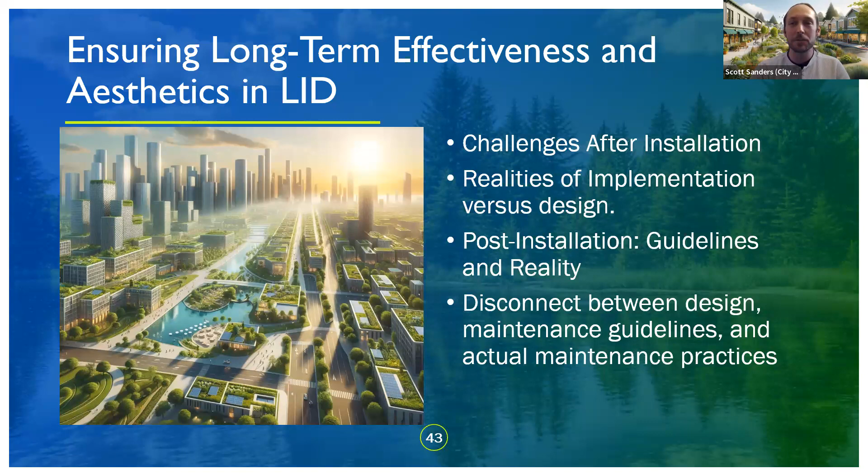Great, thank you. Great contributions. All right, so that was a good discussion there. We're going to move on to our next slide here.

So effective landscape design plays a pivotal role in creating sustainable and aesthetically pleasing environments. However, there are always certain issues and misconceptions that persist within the civil design and engineering community, and these always impact the landscape design. Right now, we're going to try to talk about the challenges and shed light on how we can bridge the gap between different disciplines to make more effective LID implementations. So my first question is going to you, Brianna. What things do you see from the civil design and engineering community that create landscape design issues?

I think probably one of the biggest things is we're trying to fit a whole lot of things into too small of a space. And some of that is because that's what we're left with. If you've got a project site and a client who wants you to get X number of units, and the code says you have to have X number of parking spaces, and then you have to have joint trench, and then you have to have amenity area and sidewalks that meet ADA, you're left with not a lot of space to fit everything. And that includes the utilities, the LID features, and then the planting. So trying to fit too much stuff in a small area is something that's very challenging.

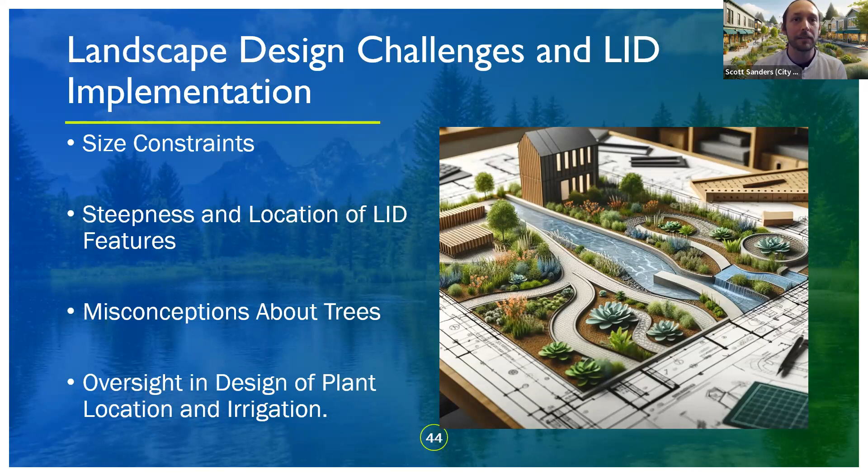Thank you, guys. All right, moving on, we're going to discuss a crucial aspect of design: how we balance the technical and the practical and make it aesthetically pleasing. This is a very big challenge, as you spoke to, Brianna, where engineers just want to put you in a box. Flannery, you just want to put us all in rectangle boxes, and maybe Brianna wants to put us in beautiful circles, and now it's balancing both. So how do you prioritize, Brianna, the requirements of LID under the technical design manual and its feasibility, but also provide general aesthetics?

Well, I'm pretty lucky to work in an office with civil engineers. So if we're working on a project together, I rely on the civils to give me the box that says this is the square footage of treatment area I need. And then they allow me to manipulate that. So if I need to change the shape of it or move it or shift it, as long as I'm staying within the watershed space, I can do that.

It's a delicate balance. I spoke to it earlier, but the aesthetics often take last place behind all the other things we have to meet, and also for the plan reviewers. I'm sure you're trying to meet the requirements of the manual, which is very technical, and you're not necessarily thinking about the aesthetics. So I think we try to get creative with the plant species that are on the LID list. I would like to see more plants on that list. That's probably a different topic, but

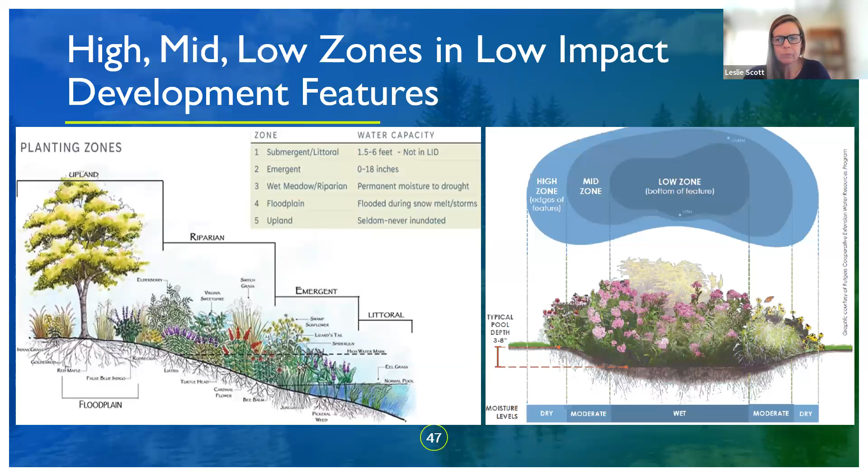All right, and going away from the zones, we're going to go beyond mulch. We're going to explore materials specified for soil stabilization, the reasons behind these, and the impacts. So Brianna, do you typically specify the type of mulch required for soil stabilization on your details when 50% establishment cannot be achieved at time of installation? Or have you ever recommended any other materials besides mulch?

Yes, we typically specify mulch predominantly because it's required by WELO. Three inches of mulch is a requirement. Where we've run into issues is when you have, say, a rain garden or an LID feature that's incorporated into a landscape area. If you put mulch in there, even arbor mulch, which is supposed to be non-floating, it will float up and clog a drain.

So we started not showing mulch in LID features and instead trying to specify rock, something that really won't float. The issue is that often in construction that gets value engineered out by the client. It's seen as something that's not necessary. And landscape gets value engineered out all the time, so that's not a surprise.

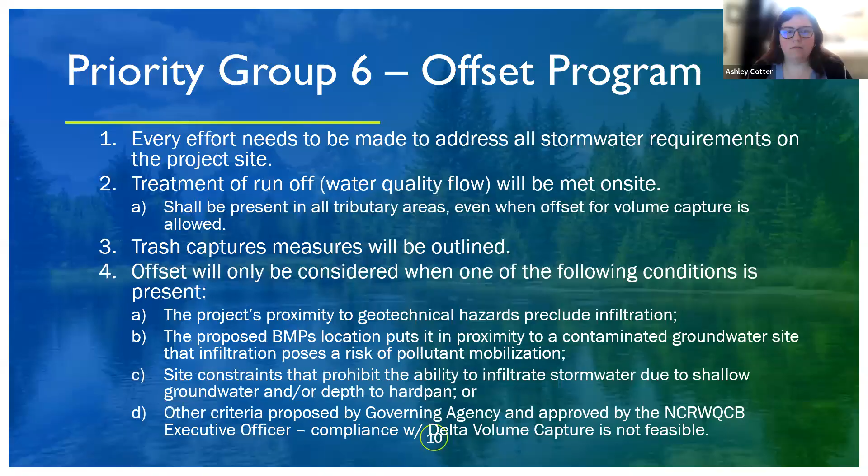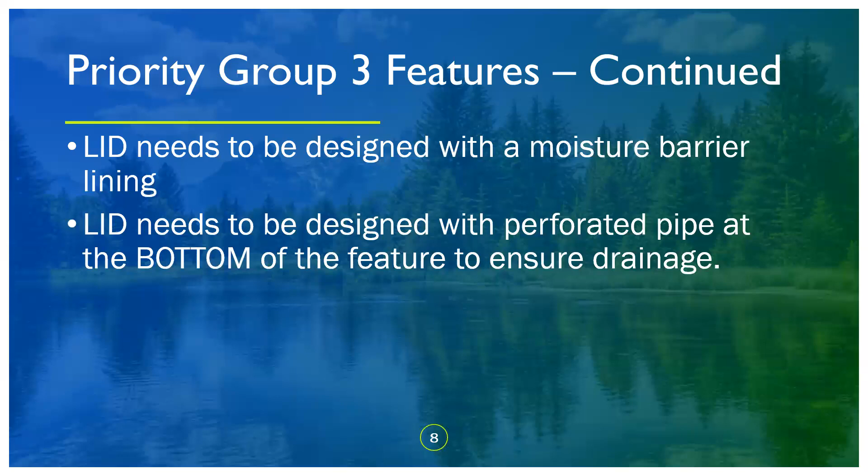Yeah, I just find it confusing, these priorities. It strikes me as a little bit convoluted in terms of which ones to choose for your project. So are you always trying to fall into priority 1 and 2? Obviously infiltration is the first, but what happens in several cases around here where my native soils just will not infiltrate? Like if it's a type D soil, I've encountered that on several occasions. So how do you deal with it?

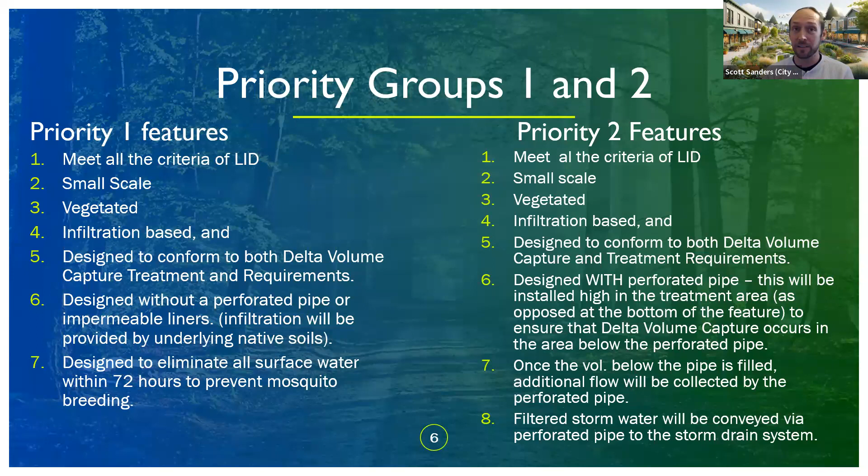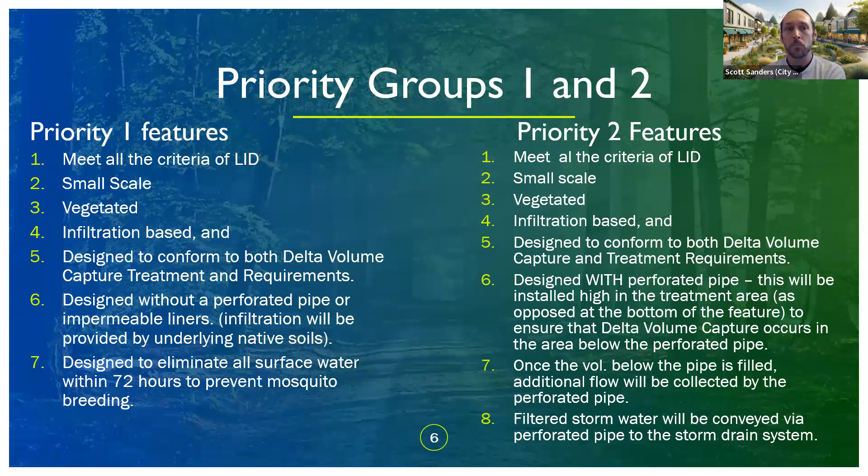Is there anyone that wants to answer that on here? Because my overarching answer is if you have soils that don't meet these capturing requirements, that's when you're going to have to put a different soil in there that does. That's our huge issue around here: we have a lot of clay soils that don't infiltrate well. So when these features are created, other soils, sand is a big one, come in and help this filtration occur.

I was just going to add to it: usually, because you're getting the lack of infiltration, you can't account for that in your capture. So usually it will require you to up your volume, your hydromod. The volume capture component is usually where that's going to get impacted. But you have to exchange out enough soils so that you're meeting the infiltration and the retention component. And then that's the best you can do.

And I will add that there are some sites where we don't want infiltration. They're a bit more of a one-off, and we can help you navigate that approval or an exemption from the regional board. That's not something that we can independently authorize as co-permittees; we have to take that to the regional board. An example would be a singular home rebuild, like a Glass Fire rebuild, where they're adding an ADU. That would be a circumstance.

They have 25% slopes, they are on soils that are known to have slope stability issues, and that project was able to get an exemption for the infiltration component. But they still had to provide treatment and control the contact time for the water, and they had a hydromod component, but the infiltration component was removed for that specific site. So it depends.

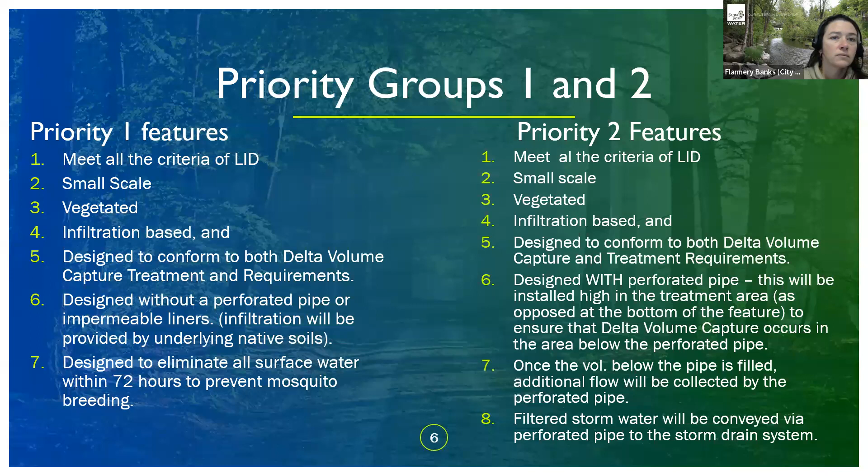Thank you. Okay. Perfect. Did we go over this one already? I think we did.

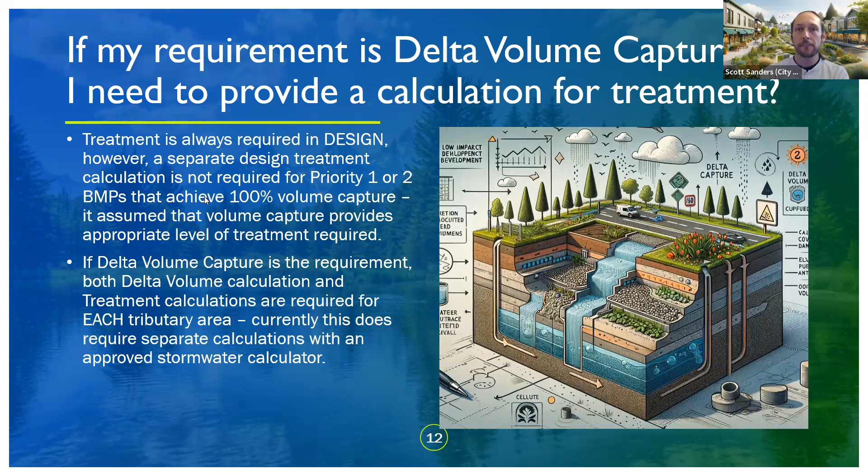Yes, someone asks, why does delta volume require the additional calculation? Not my strong suit, so if someone on here can answer that, or maybe we can get back to that question offline. And I'm guessing you're talking not only the delta volume calculation, but the treatment calculation, Evie? Probably. We'll get back to you on that.

Okay. So moving on, what is the typical value for BMP soil porosity within the required LID calculator? Typical value depends on project proposal and type of LID. For structural soils consistent with Appendix F, recommended porosity is about 30%. 30% is also a typical value listed for assumed value for compost and biofiltration soil, making it a good starting point for preliminary calculations for non-structural biofiltration soil mixes.

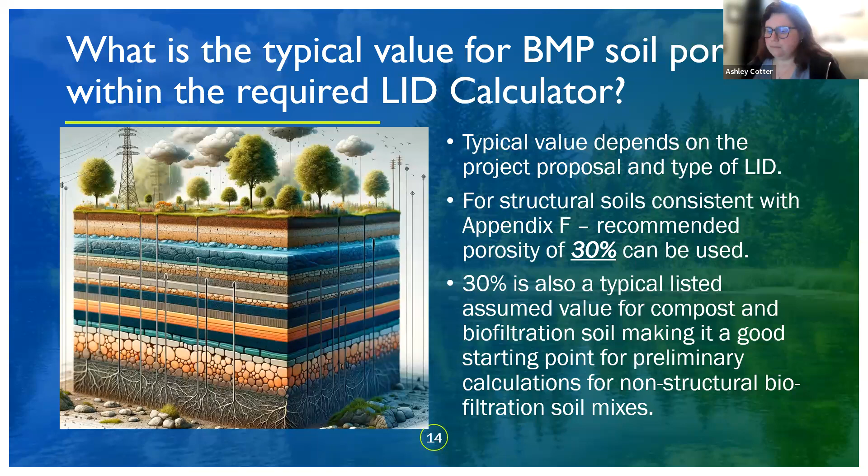On that one, I just want to add that if you're claiming something that's really significantly different from what we normally see proposed as the porosity, we may ask you to provide proof for your porosity value. So when we're typically looking at that 30% and you come in and claim 60 or 70% with the same media that everyone else is claiming 30%, we're going to ask you to supply the backup data for your claim.

And what is required to properly demonstrate depth to groundwater? So data can be obtained from government maintained public facing data portals with groundwater results within about a quarter mile of the project site, and groundwater data needs to be averaged from at least 3 separate rainfall years with average or greater than average regional precipitation.

And let's see, we've got another one here. Depth to seasonal high groundwater level needs to be evaluated prior to selection of BMP. So that's key. If seasonal high groundwater exists less than 2 feet from the bottom of the selected BMP, a portion of the calculated capacity will be used up by the groundwater. A high groundwater table may limit the use of infiltration-based measures. And in areas with known groundwater pollution, infiltration may need to be avoided as it could contribute to the movement or dispersion of groundwater contamination.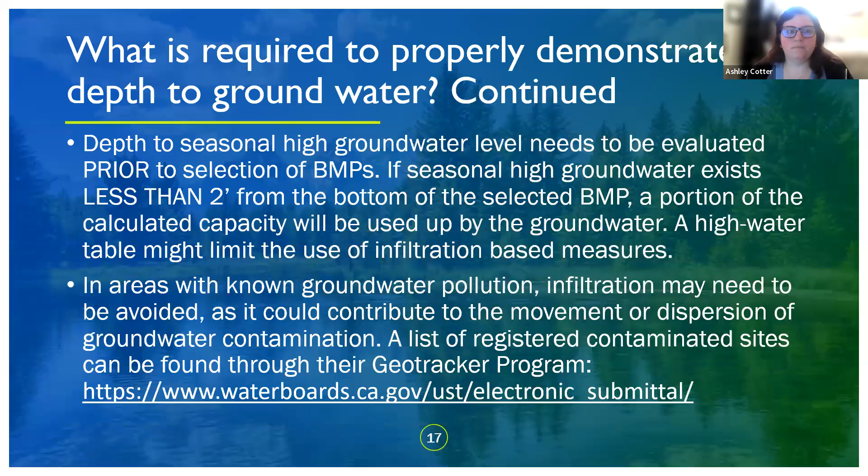I'm assuming you guys are just going to jump in here. So I'm just going to move past the feedback and question slide. So again, if anyone has any questions, just please stop, raise your hand, or just jump in there. Ashley, someone wants to go back to the first slide on groundwater. Okay. The dinosaurs graphic. They just want to see the dinosaurs. Yeah, I know, right? It's all questions. He might be looking at it, he might be typing. It looks like Zach might have a question about it. Oh, he's good. Just good information to get.

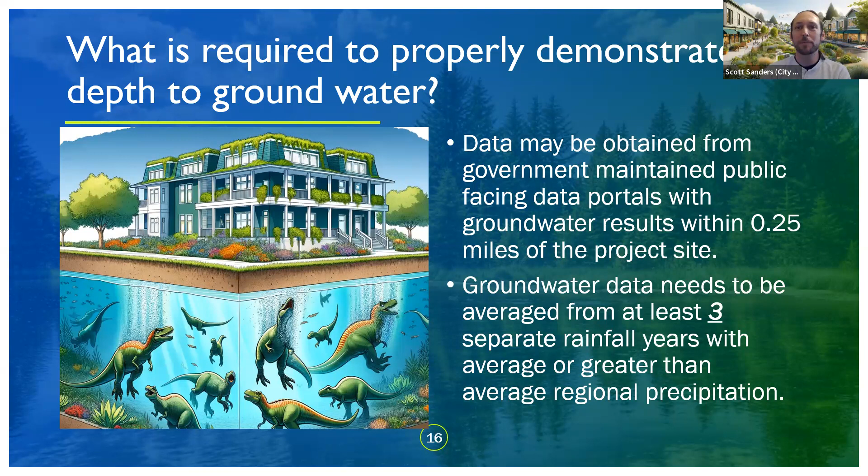And what is the intent of final LID letters, and what are the inspection requirements and milestones? So the engineer on record will provide certification and supporting documentation that the LID features have been designed in accordance to and are constructed and functioning per the current LID manual and approved LID specifications. The engineer will complete a final inspection at minimum and certify that all BMPs function with the intent of the approved design.

And the engineer on record will additionally include batch plant certification and/or a geotech report from a registered engineer or geologist for placement of soil mix. And certification will provide information describing soil mix in conformance with design standards. And the certification will be provided to the governing agency prior to issuance of the final acceptance.

What design requirements should be taken into consideration regarding long-term maintenance? So features need to remain accessible and are intended to be installed, maintained, and remain in perpetuity. Features should not be altered, removed, or abandoned without express written authorization from the Water Board. If major service and reconstruction is required, heavy equipment accessibility will be accommodated with the site design.

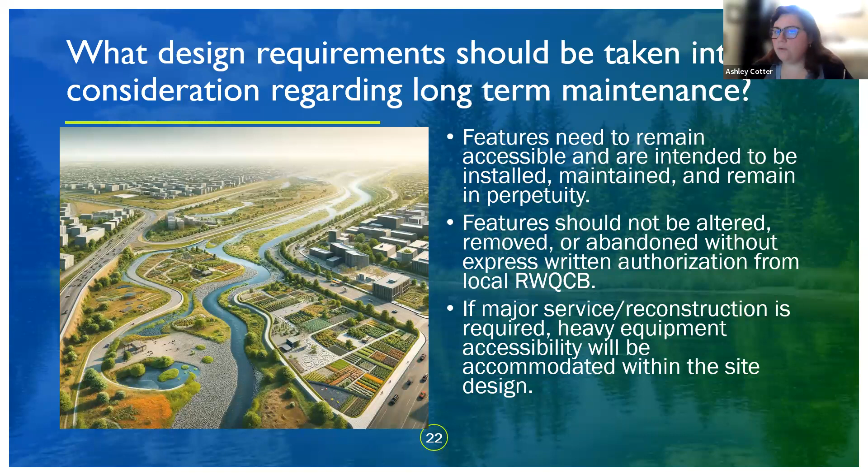So as people have been saying throughout this entire training, when you're designing, keep maintenance in mind. It's very important. And what is the preferred submittal for the LID? Stormwater LID submittal cover sheet needs to be submitted to ensure submittal completeness, as there are multiple components. Needs to include the design manual, date, version, applicant information, project information.

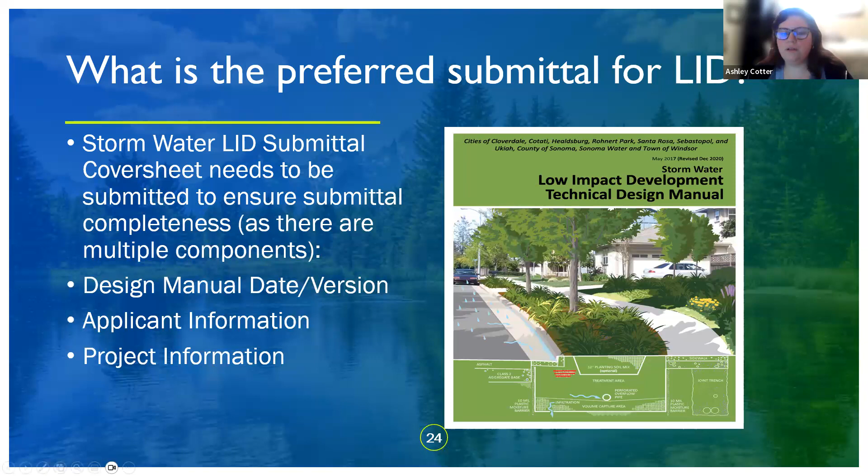We kind of reviewed a lot of this through our panel discussion, so I'm not going to really go too in depth into this. Your LID cover sheet will include everything that you need. Your narrative, as we've expressed before, needs to be very consistent with what you're expressing on your cover sheet. It needs to include your description of your existing site, proposed project type.

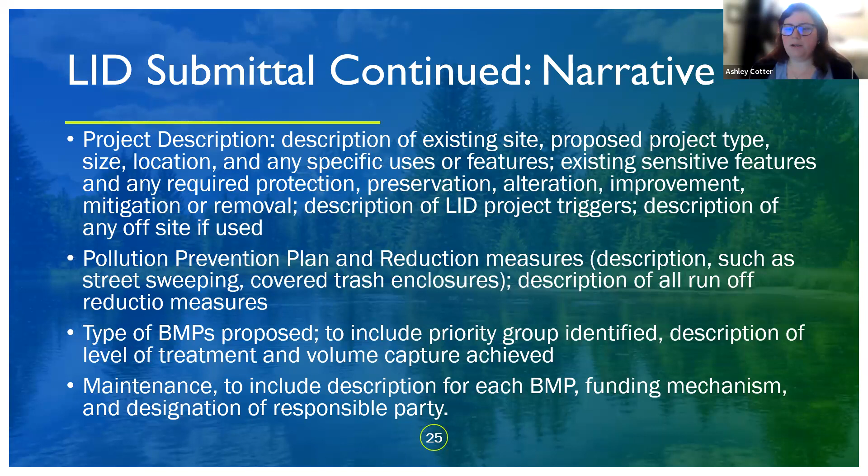You need to include your pollution prevention plan and reduction measures, and description of all your runoff reduction measures, your types of BMPs proposed, and your maintenance plan, which actually needs to be specified to your LID. And also you need to designate your responsible party, because that question has been coming up in the chat as well.

And then also you need to include your exhibits. So you need to include street names, property lines, storm drainage system to include inlets, waterways, title block. You need to include existing condition exhibits, soil types of the existing sites, and proposed tributary areas for all proposed inlets, and the existing impervious area, if any.

Hey, can I ask a question at this point, that last one? Yeah. I'm really curious, since we have a lot of the engineers here, how they would feel about if we required all the LID features to be shown on a separate plan sheet. We find it very difficult sometimes to find those and find all the details; the plants are on one, some of the details are on another, the numbering system is on another, and we found it very difficult.

It would really be great to all be on one, just kind of how the SWPPP BMPs are all shown on one sheet, on an erosion control sheet. Are there any comments that I could get on being able to show all the LID features on one plan sheet? You have my support. Right. I get it. Totally doable. I believe that's what we do already. Okay. I'd say it generally helps a lot in construction.